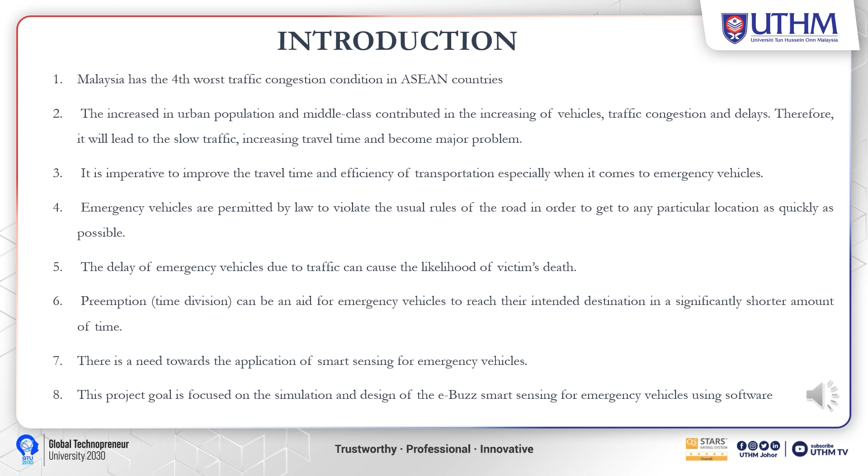With this, we can clearly see there is a need for the application of smart sensing for emergency vehicles. This study approaches an application of smart sensing to address the alarming traffic congestion. The goal of this project is focused on the design and simulation of the e-Buzz smart sensing for emergency vehicles using software. The aim is to ease the authorities responsible for reacting to emergencies, such as ambulance, police, firefighters, and other responsible authorities. So the goal of this study is to address the above-mentioned problem.

First and foremost, to develop and prioritize information from real-time traffic monitoring to provide a faster emergency response without compromising safety. Next is to evaluate the method using a case study for efficacy in providing a faster emergency response and minimizing its delay on traffic. Lastly, to develop a complete simulation of smart sensing for emergency vehicles using software.

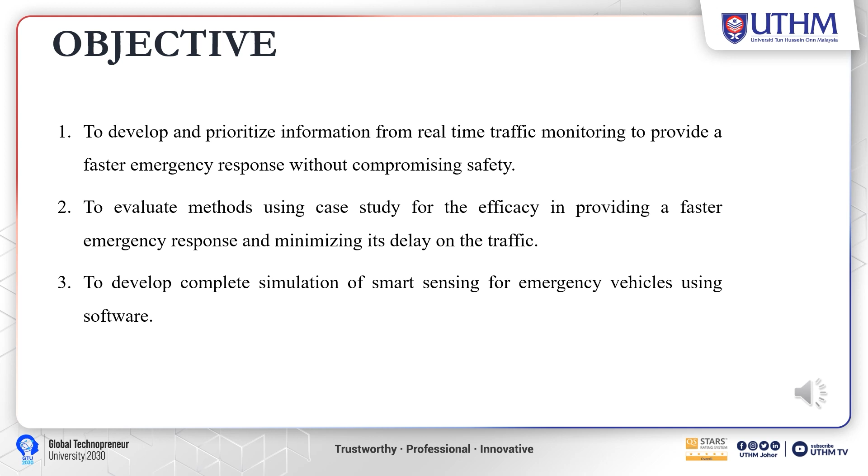The scope of this project is bound to the case at Pekan Bukit Pasir, Muar, which is located at Johor, so the traffic flow is heavy during rush hours. Hence, the simulation of this project will be conducted during rush hours. The number of vehicles increases during these specific rush hours, therefore the accuracy of the simulation is highly expected to be realistic based on the traffic flow.

Based on our observation, by visiting Pekan Bukit Pasir, Muar, Johor, we collected information related to our objective to improve our real traffic simulation, as this project is still being developed according to statistics. The traffic flow is heavy during peak hours, between 5 p.m. to 7 p.m., and the simulation will be conducted during these peak hours. The estimated number of cars is between 30 to 50 during peak hours, and sometimes it exceeds more.

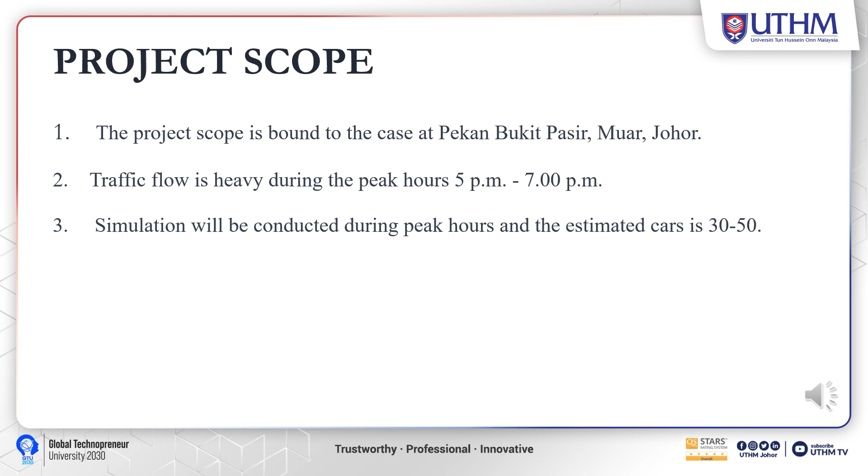From this project, there are three things we mainly want to achieve. First, to develop a proactive approach that uses real-time traffic monitoring information to provide faster emergency response without compromising safety rules of the road. Secondly, to develop a system based on siren characteristics to detect sirens from emergency vehicles effectively and respond promptly. Lastly, to conduct a complete simulation of smart sensing work on the approach of emergency vehicles towards traffic lights.

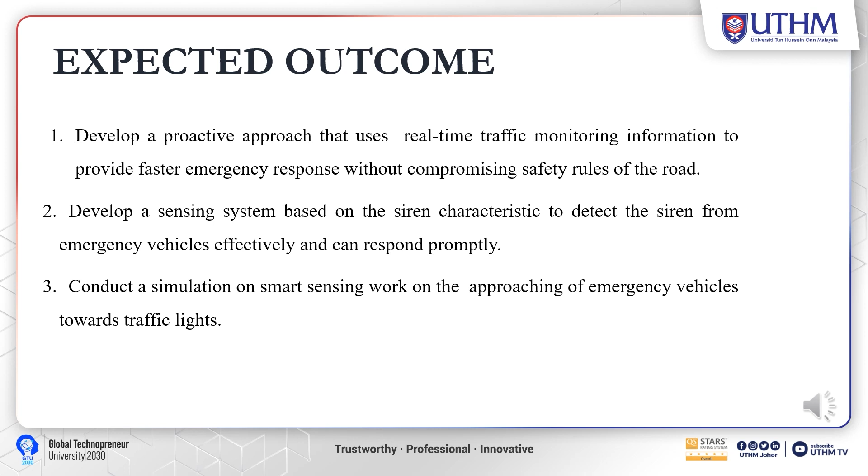What you are seeing here is the design of the e-Buzz system, or the e-Buzz device itself. Some designs from previous studies became our sample designs that others had done throughout the earlier design phase, and some fresh concepts were developed. This design also uses the concept of a traffic light with a single signal light besides a sensor to inform road users.

The aim of this design is to have a big dimension to provide suitable space for other electrical components and make it easy for emergency vehicle drivers to recognize the signal light. The design of the device is approximately not bigger than a traffic light to avoid confusion to other road users. This design also takes into account the effectiveness of the sensor working principle to increase the volume of the emergency vehicle siren by implementing an audio amplifier to run on this system.

To have the effectiveness of the sensor, the best place for the sensor is outside of the device.

This is our first look of the e-Buzz produced from SolidWorks. It took a lot of time to figure out this idea, but the main and side components of the e-Buzz, there are 13 parts of this e-Buzz device, which can be divided into siren base, siren cover, rotating part, bracket, microphone, bolt 20mm, bolt of 10mm, mount hook, nut, pole, display screen, and display screen mount.

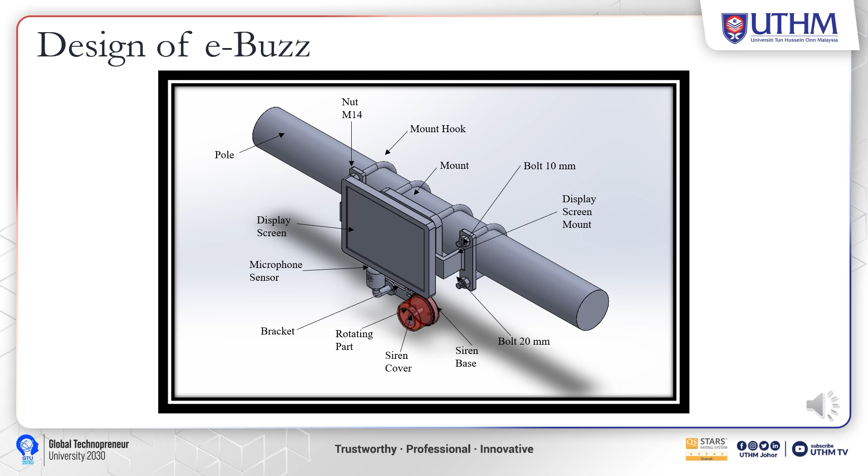The table below shows the material selection of the e-Buzz. All the selected materials have certain tasks and functions required to make the product function well. To make the device operate well, we make sure to make the right choices and decisions of the material to ensure that the project objectives can be achieved and fulfilled. After thorough discussion and research, we have decided the material for our device.

For the siren base and siren cover, we decided to use plastic. One reason is because it is tough and has resistance toward rusting and is UV stabilized to provide years of safety. For the rotating part, we use high strength low alloy steel as it can maintain the formability and the weldability.

For the bracket and both bolts, we use stainless steel, which we know is highly durable due to its corrosion resistance and durability. For the mount hook, we use alloy steel as it has high tensile strength and easy compressibility. For the nut, we use stainless steel due to its high durability and corrosion resistance. For the pole, we use alloy steel.

For the display screen, we use LCD for its high energy efficiency and low power consumption, which is the main reason we decided to use an LCD display. For the display screen mount, we use alloy steel as it has high tensile strength and easy compressibility.

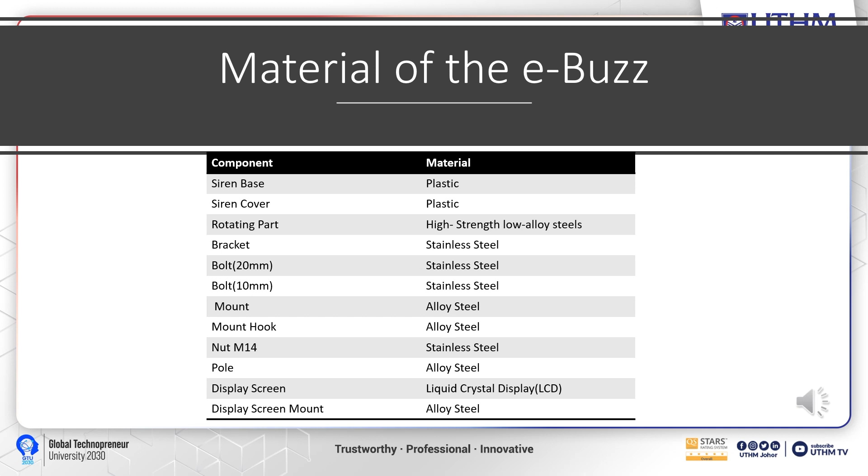As stated earlier, the aim of this new design and simulation of e-Buzz for emergency vehicles is to ease the authorities responsible to react to emergency situations, such as ambulance, police, firefighters, and many others. The main factor to ensure this simulation works depends on the type of sensor used, its application, and its reliability. It is to be noted that the sensor is very sensitive to its environment.

The functionality of the sensor is to detect the sound of emergency vehicles and react immediately by giving a signal to the parallel traffic light to change the indicator from red to green. However, there are other consequences which affect the efficiency of the sensor. This problem may lead to traffic congestion on the road. Heavy-duty traffic, due to increase in the number of vehicles, produces a lot of waves causing the sensor to detect unnecessary frequencies, making the traffic light conversion volatile.

Thus, prevention of sensor waves and frequencies is utmost important for us to ensure the success rate of this e-Buzz device. The applicability of sensors such as ultrasonic sensor, color sensor, and light sensor are testable with predictions for the success rate of this project.

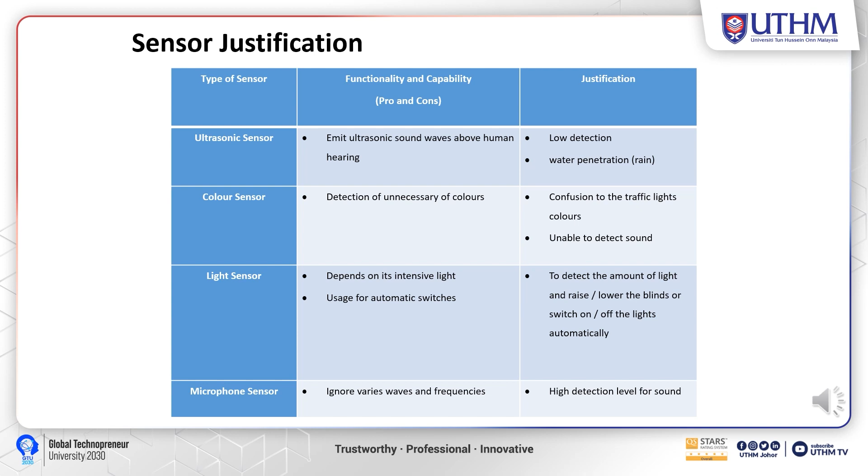This table shows the sensor justification on why we chose the microphone sensor as our main sensor for the e-Buzz device. Here are the pros and cons of each sensor, and the microphone sensor is chosen due to its capability to ignore various waves and frequencies and its high detection level for the sound of emergency vehicles.

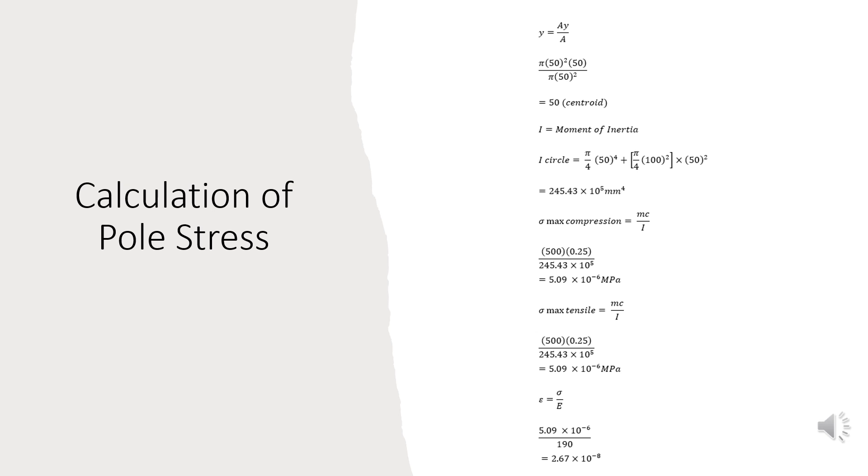The pole stress calculation of the e-Buzz device is based on the knowledge and application of solid mechanics, which focuses on bending stress. The aim of the calculation is to find the maximum stress and strain on the pole which holds the e-Buzz. Here is the calculation of the pole stress.

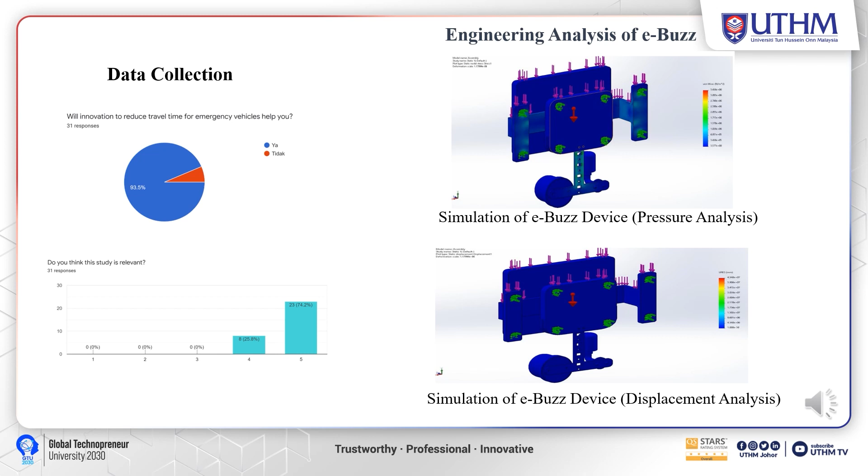This shows that the e-Buzz device will be able to support the load applied. Deformation does not mean material failure. It just means that a component was displaced beyond its elastic capabilities and will have a permanent deformation once unloaded.

The results concerning the existing streets condition at Pekan Bukit Pasir, Muar Johor, and the simulation model of the e-Buzz device concept applied in PTV VISSIM will be discussed shortly. Here is the video of the simulation in PTV VISSIM.

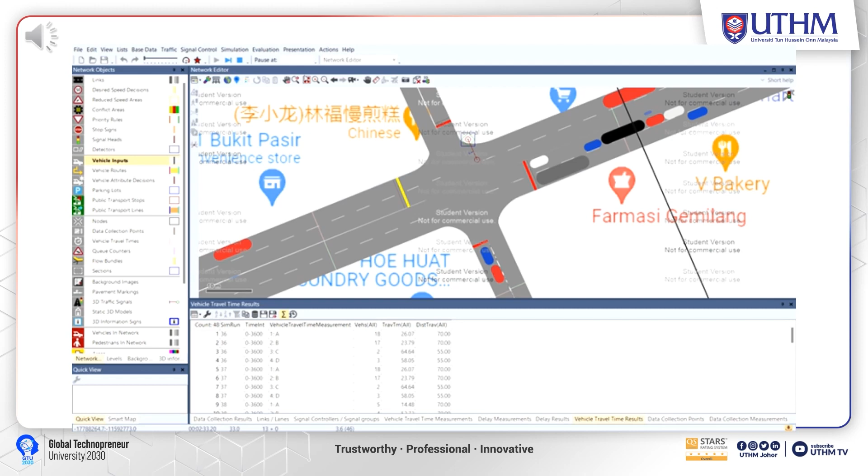There are 4 street accesses existing from Pekan Bukit Pasir. I'll play the simulation for you. The first simulation modeling was conducted by implementing one approach, which is following the latest data traffic flow.

The PTV VISSIM simulation results are presented in table 4.3. This table shows that after conducting the first simulation modeling, the average vehicle speed passing these 4 streets differs for each street. Queue delay and vehicle acceleration are other main parameters recorded from the software in order to minimize travel time.

For the first simulation, we just ran the software using the data traffic that we got from observation at the Pekan Bukit Pasir area. This data will be compared to the last simulation in order to see the difference in statistical value after applying this e-Buzz device concept.

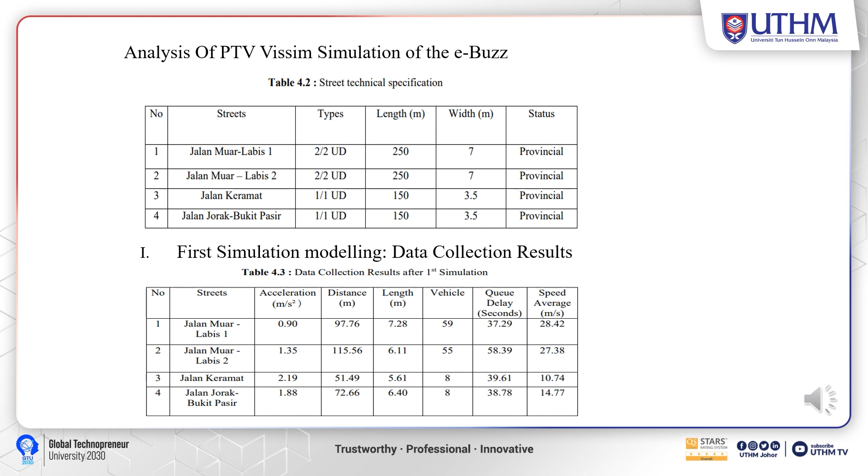The second traffic management simulation modeling was implemented with one approach, which was to shift traffic flow circulation from the 4 main streets. After implementation of the second simulation, the performance of the streets can be seen in the following data.

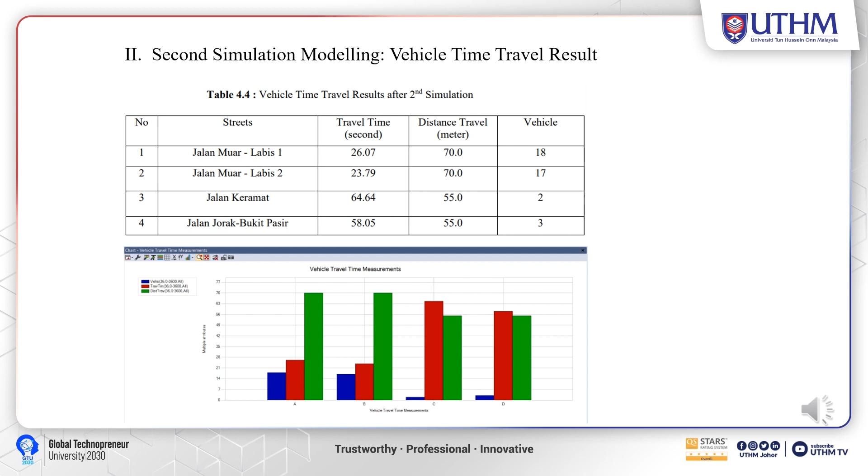As shown in table 4.4 and the figure, this is the statistic that we obtained from the PTV VISSIM software. For the second simulation, the data can be divided into 3 main parameters: time traveled, distance traveled, and the number of vehicles on the street.

For the third traffic management scheme, conducted with one approach as well, we added detectors for the 2 main streets, which are Jalan Muar Labis 1 and Jalan Muar Labis 2. This is because the e-Buzz device concept focuses on the 2 main roads often traveled by ambulances or emergency vehicles.

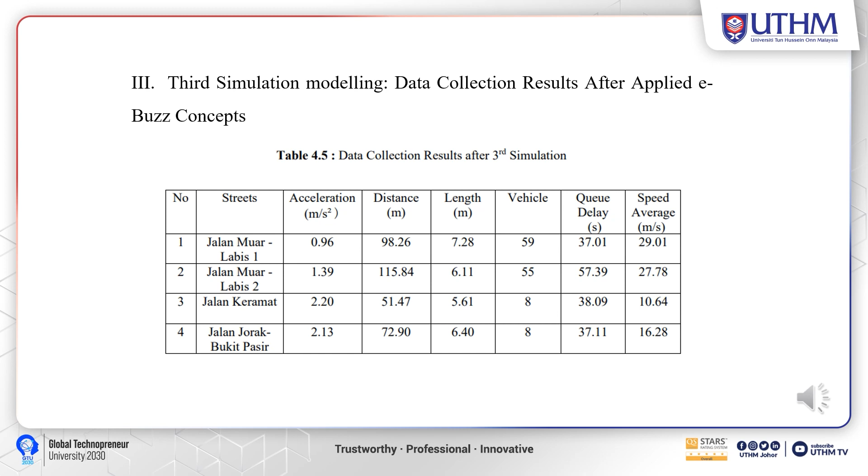Passing through these 4 streets after applying the e-Buzz device concept, at an average of 16.28 meters per second to 29.01 meters per second. A reduction of the queue delay, at an average of 37.01 seconds to 57.39 seconds. This shows that the concept will smooth the traffic flow at the 4 main streets.

The simulation by PTV VISSIM clearly shows the difference in travel time with and without the e-Buzz, there's a large gap in the data. With the presence of the e-Buzz, travel time data for the ambulance is minimal.

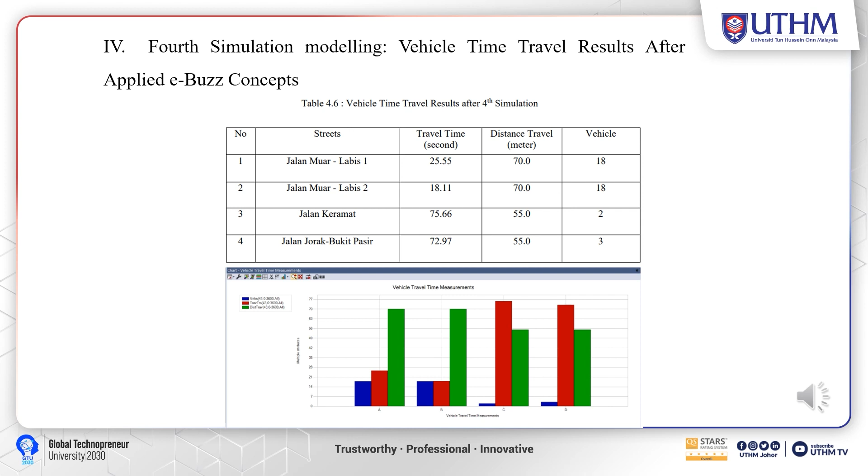For the advantages, clearly based on the data shown, it clearly shows that it can cut down the travel time, and shows that we are able to reduce the travel time for this emergency vehicle, and this directly saves the victim's life if any accident or unwanted thing happens. So the authority vehicles can reach their intended destination with minimal time.

For the disadvantages, to fabricate the e-Buzz itself requires a huge cost and it takes a long time to produce the product.

For the future improvement of the system, there are three main suggestions. First, decrease the cost to produce the product. We can do more research and development on how the production cost can be reduced and saved.

Secondly, we can find ways to reduce the production time of the product. In the future, we can do more research on where the time in processing the e-Buzz can be cut, and maybe simplify the system. Lastly, find a more advanced and suitable sensor to detect emergency vehicle sirens.

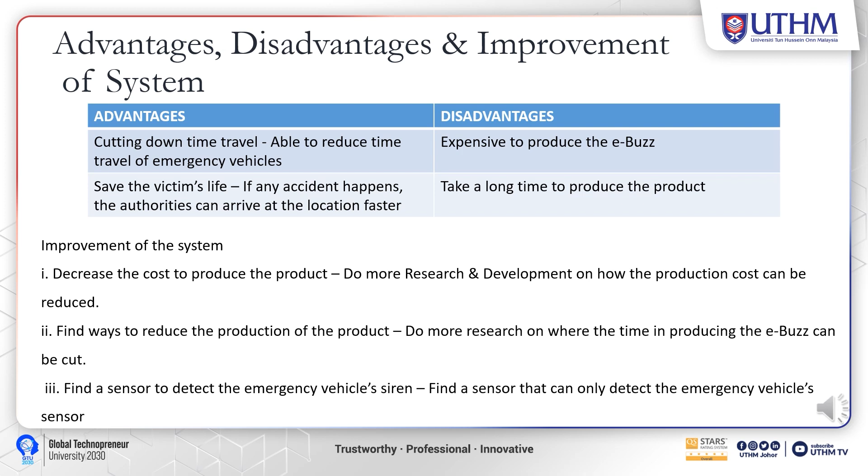The insights and results gained from this study draw conclusions consistent with the purpose of this study. Judgment and choices are made with the use of reasoning. While the design and simulation of the e-Buzz smart sensing model indicates a unique view of the study, the findings strongly indicate the relevance and need for smart sensing for emergency vehicles within the emergency response unit.

Such as police authority, fire department, rescue authority, healthcare department, and the list goes on. There aren't any missing values within the data set, and the response on the survey is satisfying, where we gained a total of 62% response rate achieved.

For the limitations, this study is limited time-wise. The one-year term to complete this study, the time constraint can also affect the completion of this research and case study project. Besides that, another limitation faced was in conducting the 3D printing, where there were several limitations from the aspect of time allocation, the machine specification for doing the digital fabrication 3D printing, and human error when operating the 3D printing machine.

As for the contribution and implication of this study, this was the first and successful comprehensive study on the design and simulation of smart sensing for emergency vehicles tested via PTV VISSIM. This research project will bring a significant impact on Malaysia's traffic response towards emergency cases.

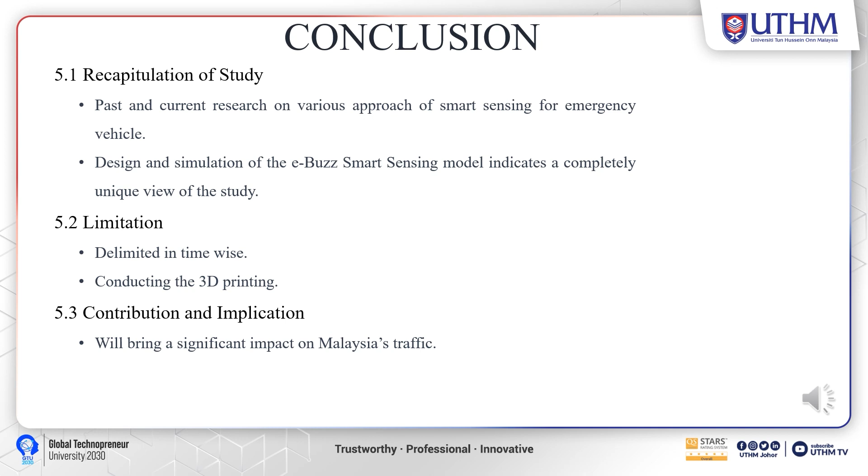There are various research and proposals of intelligent traffic systems intended to react to emergency vehicles. This simply shows and validates that there is a need, and reflects the good acceptance and applicability of the proposed model. A new design and simulation of smart sensing for emergency vehicles demonstrates a qualitative methodology by examining the relevance and impact of this project.

This study recommends that in any interdisciplinary field of research, it is important to understand the key elements within the identified field of study. Initial design and simulations were key to understanding this study. The respondents for the specific research must first be identified. It is important to know and identify the experts in this research area, as this can help document and streamline the scope of the project.

We also have to study the theory to have a solid knowledge of the applicability of this study, so this exercise will be extremely helpful during the analysis phase. The data collection is done over a time frame, and the data sets are then filtered. Allocated time should be sufficient to avoid false assumptions.

Additionally, the simulation using PTV VISSIM software for this project is based on a free trial. Therefore, for future recommendations, using this free trial PTV VISSIM has certain limitations, such as the presence of a watermark when conducting the software. So when using this software, our recommendation is to apply for a license from the PTV authorities for a research-based license.

So for the closure of this paper, a new design and simulation of smart sensing for emergency vehicles has been successfully completed by applying the knowledge of mechanical and civil engineering. The finalized design of this e-Buzz has been greatly generated and fabricated using a 3D printer.